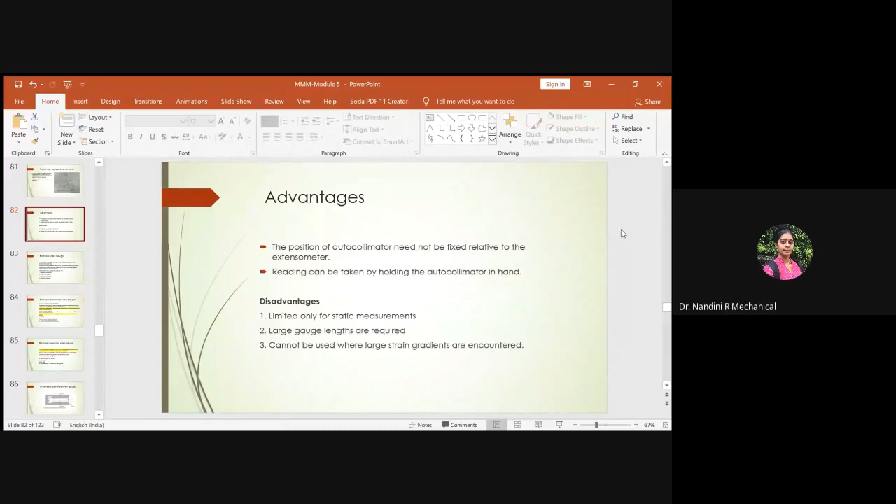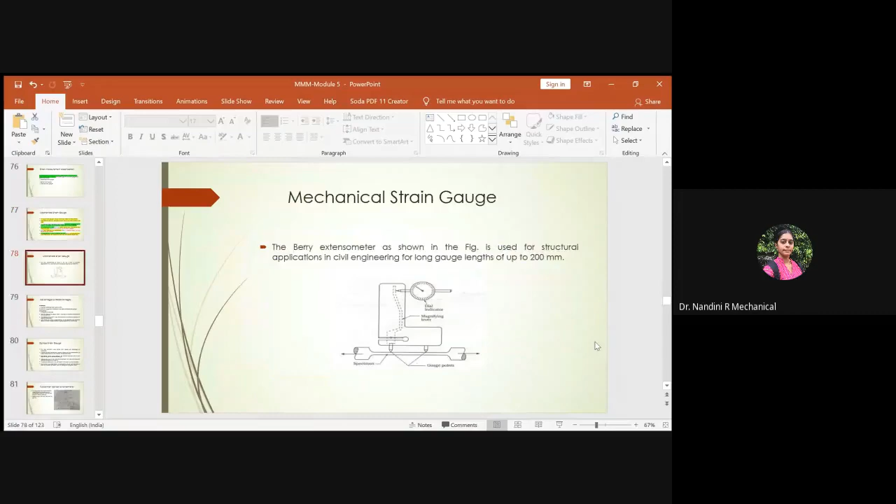Related to strain measurements, we have done what do you mean by strain, strain measurements, classifications, advantages, disadvantages, right? All these are done. Then we dealt specifically with electrical strain gauges. We went on with respect to its classifications as well.

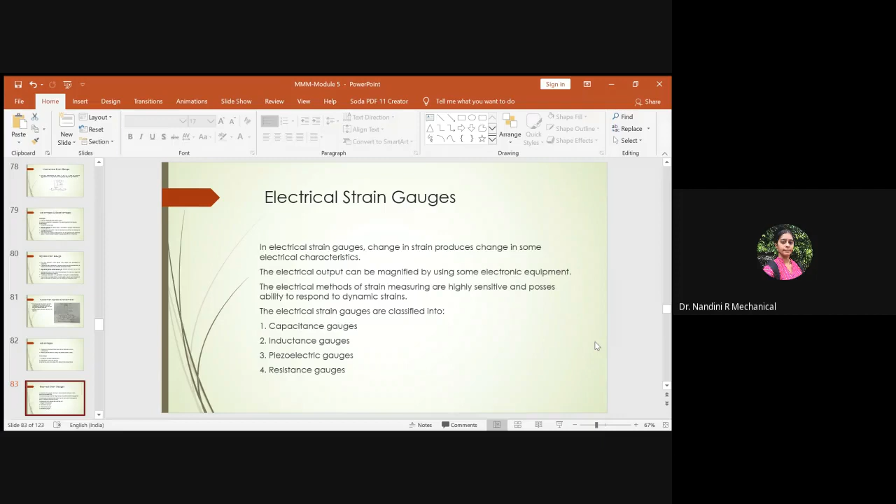In your syllabus, you have in-depth description for electrical type of resistance strain gauges. So we went on related to what you mean by electrical strain gauges, how does it look, how it operates, and what are its classifications. In that we were held up with the last type of classification, which is nothing but our semiconductor or piezo-resistive strain gauge. So this part we have to now deal about.

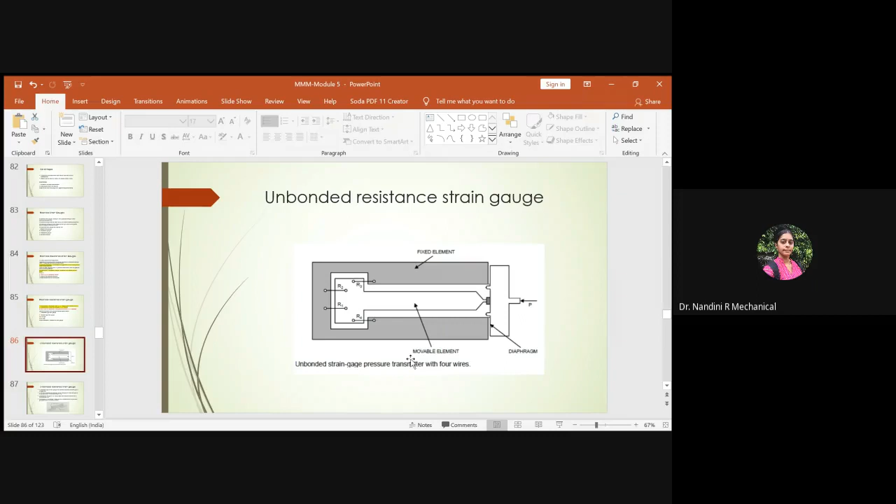We have dealt about how the structure looks like in unbonded type, how it is operated, and with respect to bonded type, we had two classifications. One is the wire and the foil method. So that also we discussed. This is the foil type which is done. So now we have to focus on semiconductor gauge, or it is also called as piezo-resistive strain gauge.

If it is piezoelectric, it becomes a dielectric material. If it is piezo-resistive, it comes into the category of semiconductor. Hence the name dual, either semiconductor or it is called piezo-resistive. So piezo-resistive and piezoelectric, both are different. It comes into two huge classifications, which is semiconductor and dielectric. So here we are just focusing on piezo-resistive strain gauge, which is also called semiconductor strain gauge.

These piezo-resistive strain gauge or semiconductor gauges are usually formed by being etched out from the single crystals of either silicon or germanium. Both silicon and germanium are semiconductor materials. So these are etched out through a single crystal of silicon. This helps in getting the piezo-resistive strain gauge in the form of thin films.

If you want it in the form of thin films, then you etch out from the single crystal. If it is in bulk, if it is multi-lattice structured, then it will not be a single crystal, single orientation of the lattice will not be available in that case. Since it is a single structure, we are focusing here on semiconductor gauges of thin film or foil kind of structure.

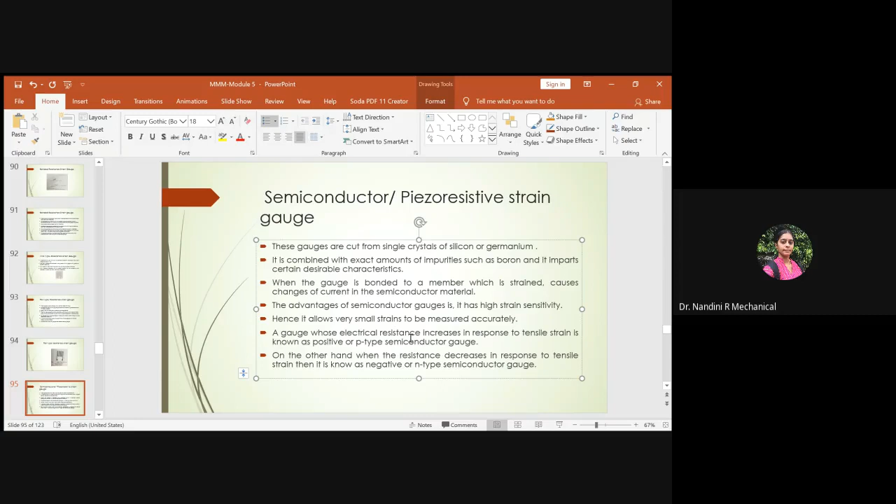There are some configurations related to the dimensions we have to use. Usually a semiconductor gauge consists of a rectangular filament, as shown in the figure, which could be made using either silicon or germanium. As for the area, it will have 0.05 mm thickness and 0.25 mm width. This is the specification for a semiconductor gauge of rectangular filament. Along with this, the length of the semiconductor gauge can vary from 1.5 to 12 mm, based on the requirement and functionality characteristics. You can select the semiconductor strain gauge of different lengths as per the requirement.

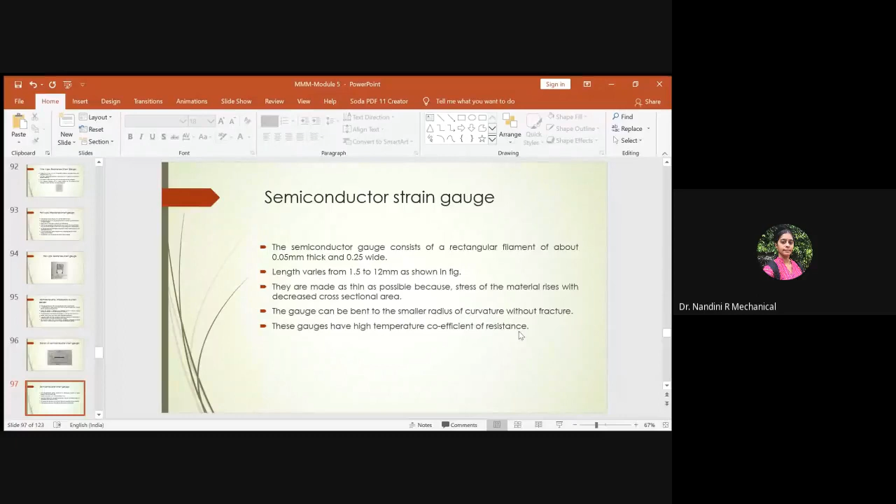Due to this thin thickness, the gauge can be bent to a smaller radius of curvature without fracture. These semiconducting materials are flexible and can be bent to the smallest radius of curvature without fracture because they are not brittle in nature. This is one characteristic of semiconducting strain gauges. Also, these gauges are very suitable for high temperature coefficient of resistance measurements. So these are the important characteristics of a semiconductor strain gauge, how it looks and how it operates.

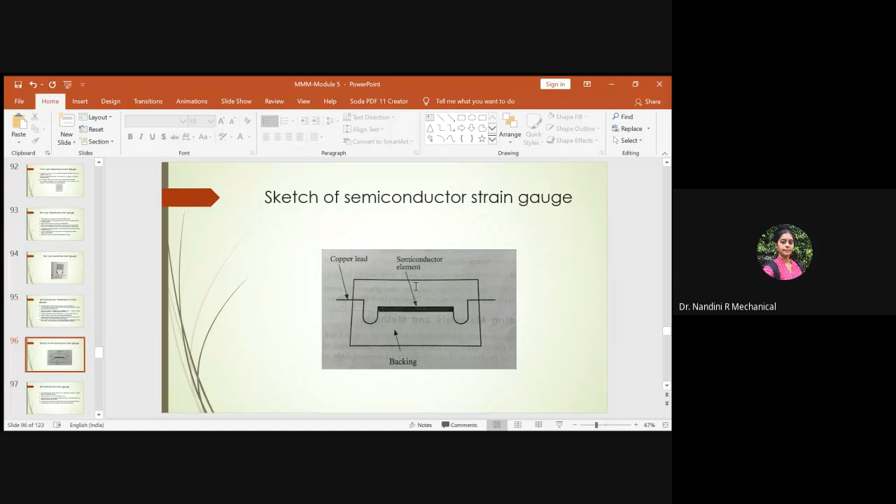Apart from that, there are a few disadvantages we have to speak about, and these are very few. The first one is the output of the gauge is non-linear with strain, meaning the output from the gauge has a non-linear characteristic curve. The response for the strain in the output electrical signal does not vary linearly; it is non-linear and could even be exponential. It depends on how the output is revealed for the given input strain. So this is one disadvantage, that it is not linearly variable. The second one is the strain sensitivity is dependent on temperature.

You cannot say the sensitivity of the strain you get at room temperature will be the same as the sensitivity of the strain you get as temperature increases, because it is directly dependent upon the external temperature where you keep the device. Hence the strain factor is not an independent variable, it is a dependent variable in case of semiconductor strain gauges. This is also one of the drawbacks, because when you use this type of strain gauge you should be aware of the room temperature and the temperature enhancement, since with increase of temperature you get variation in the strain.

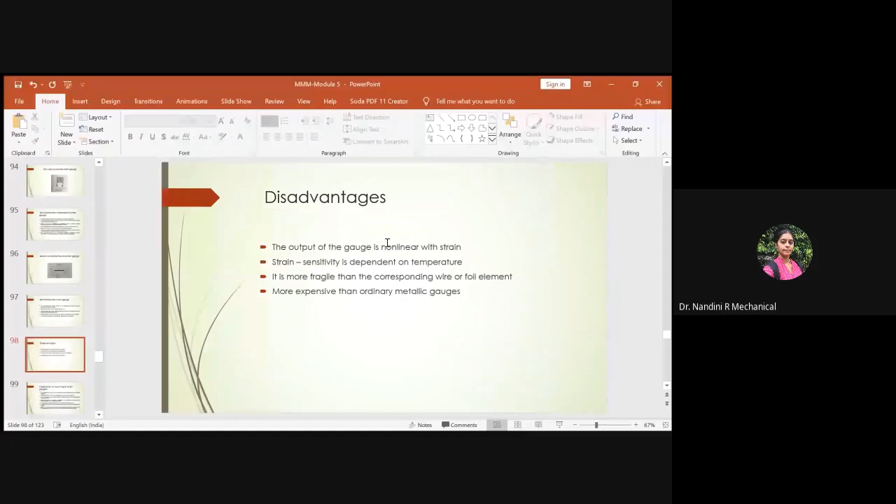After knowing about the concept of semiconductor strain gauges, you should understand how the preparation and mounting of a strain gauge actually takes place. So what are the steps to be followed? We have a few steps, and one has to strictly follow and abide by the rules and regulations of the procedure so that you get a good, well-packaged strain gauge device.

The first step is that the surface on which the strain gauge has to be mounted should be cleaned properly. The strain gauge could be embedded on a movable platform, or on a foil, or on wire, as studied in the wire or foil method. So the surface on which the strain gauge has to be embedded or mounted has to be cleaned properly.

Second, if you have any traces of grease or oil on the surface, it should be cleaned using acetone. This acetone helps clear any grease, oil, or impurities present on the surface on which the strain gauge has to be mounted, because it should not create voids or impurities embedded between the surface and the strain gauge. If that happens, proper adhesion or bonding will not take place, and as a result you have to ensure it is also cleaned using acetone.

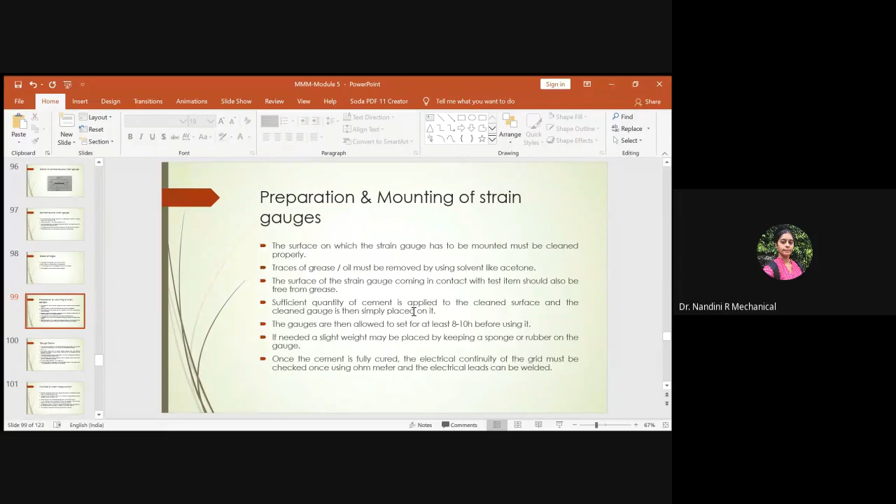So now you should come to know what is meant by gauge factor. We have studied this in depth in our strain gauge experiment, where I explained the concept in brief, around a 1.5 hour class. This is just a brush up in the fifth module, but let us still focus on the gauge factor, and what you mean by it.

I have already told you that the change in resistance relative to the change in length gives us the gauge factor. The electrical resistance of a metallic conductor usually varies directly with its resistivity and length, but is inversely proportional to the cross sectional area. So we have the equation: electrical resistance equals rho L by A, where rho is the resistivity factor, L is the length, and A is the cross sectional area of the metallic conductor being used.

One thing to keep in mind is that to measure electrical resistance, we always use a metallic conductor. So in the metallic conductor, what is the resistivity factor, what is the length of the conducting material, and what is the cross-sectional area of the conducting material? Based on these parameters, we evaluate the electrical resistance of the given metallic conductor.

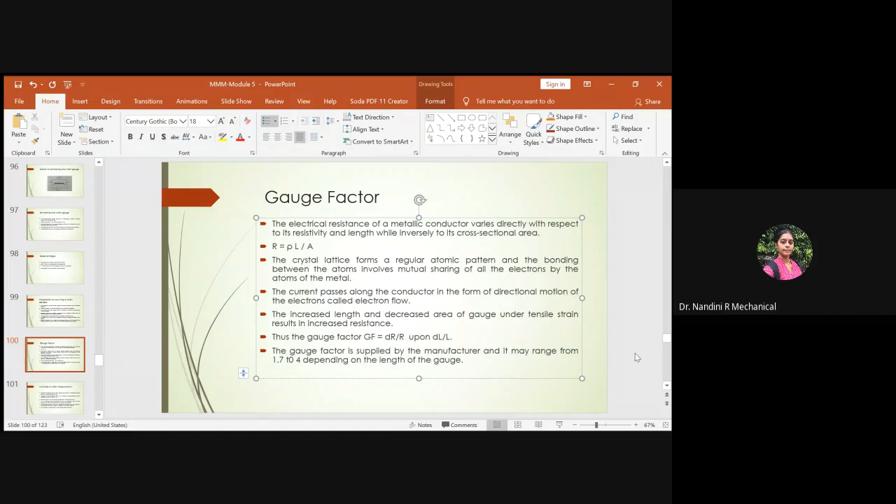We also spoke about the length of the gauge material, which varies from minimum to maximum length. Based on the length of the gauge material, the gauge factor will keep on varying, and it purely depends upon the electrical resistance of the metallic conductor we are using. So based on the variation in electrical resistance and the variation in length of the gauge, the gauge factor will be provided by the supplier, and this value mainly depends upon the length of the gauge we are using. So this is about the gauge factor.

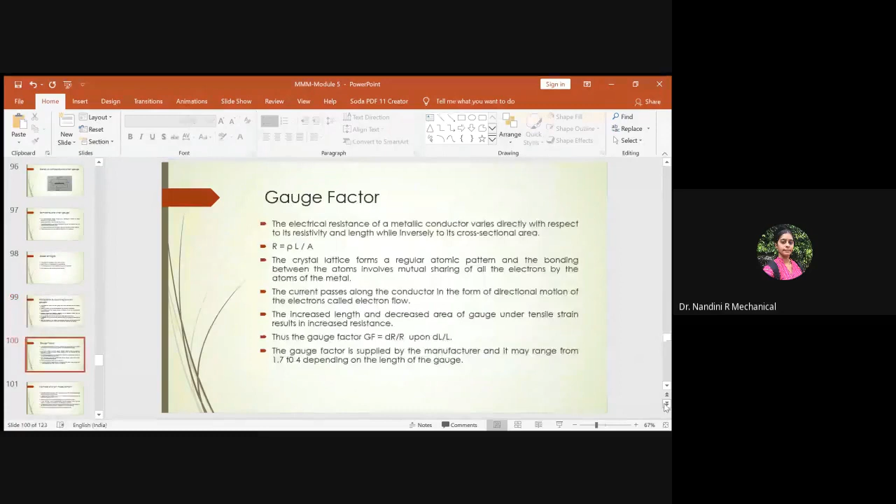Once you are aware about strain gauges, preparation method and gauge factor, you should also know which methods are used to measure the strain. Usually we follow two: the null method and the deflection method, which we have dealt with already with respect to our experiments. So we are again telling the same stories.

Electrical resistance type of strain gauge usually uses a sensitive Wheatstone bridge circuit for measurement of strain. We have already explained what a Wheatstone bridge circuit is, which has four resistor arms, how you balance it at the null position, and when you vary one of the resistances, how the variation is measured using the deflection method.

So the same thing - in order to measure the strain, we use a Wheatstone bridge circuit, which consists of four resistive arms with a source of energy. These resistive arms are connected to a battery and a meter to show the readings, as shown in the figure. You have seen the sketch already, where you have four resistive arms connected to a meter with a source of energy, which is our battery, and this is the flow of current through the resistor arm.

And for balancing, we will balance and get the null position. So the basic principle of the bridge can be divided into two categories. One is the null method, another one is the deflection method.

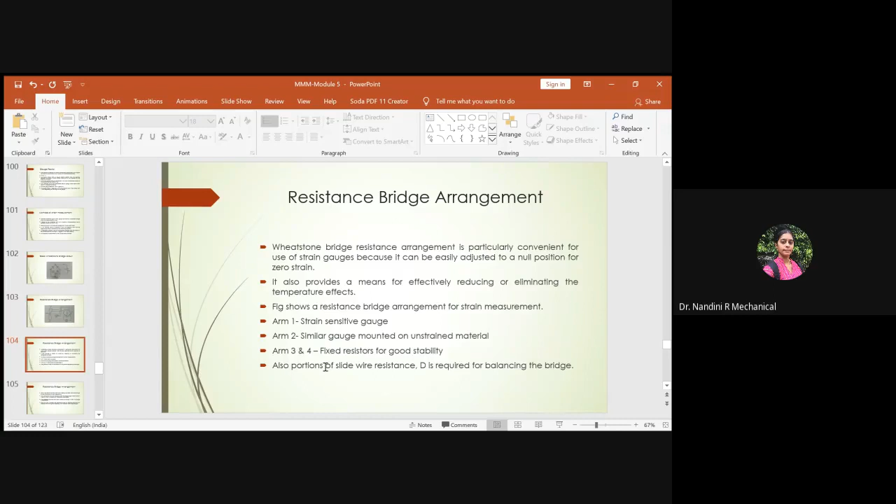So in case of the deflection method, continuous readings are taken from one change of strain to another without rebalancing. In this resistance bridge arrangement, we won't keep on balancing at every stage, because due to one strained and one unstrained arm, there will be variation in the values and it will not be balanced. As a result we go on with the deflection method and take the readings.

So this is convenient in comparison to the other method, but it is less accurate since the bridge output tends toward non-linearity. So here the strain you get is not varied linearly.

The output we get is a non-linear variation with respect to strain, and as a result, the readings are not very accurate. But it is more convenient because there is no need to balance it each time, and hence it is called the convenient method. Since it cannot give linearly variable output signals, it is not very accurate, and the strain value keeps varying depending upon the non-linearity factors associated with this kind of bridge.

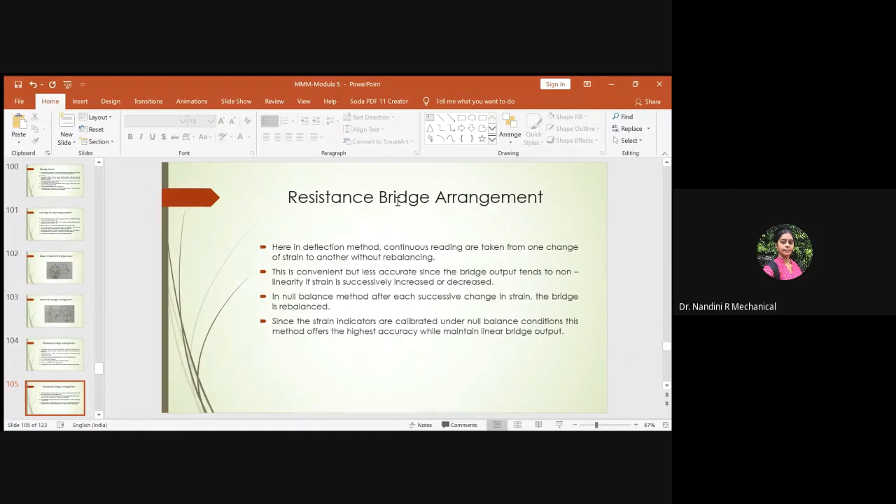So that's what I told you. In the resistance bridge arrangement, you have two arms for the resistors: one arm for the strained strain gauge and the other for the unstrained strain gauge. Due to the strained and unstrained strain gauges, you will not have a null position, and hence you take readings of the variations in the indicator without balancing — this is the deflection method.

Similarly, if you want to opt for the null balance method under the resistance bridge, you keep doing the balancing of the bridge before taking the reading, which gives more precise and accurate results that vary linearly. In the deflection method, however, the strain response varies non-linearly. So based on the requirement and the accuracy needed, you can go ahead with either the null method or the deflection method, even in the case of the resistance bridge arrangement.

In a normal Wheatstone bridge arrangement, you have four normal legs of resistors R1, R2, R3, R4, whereas in the resistance bridge arrangement, two legs of the resistors are removed and replaced with strain gauges — one with strained material and the other with unstrained material. But in both cases, you can measure the output signal under the null method and the deflection method.

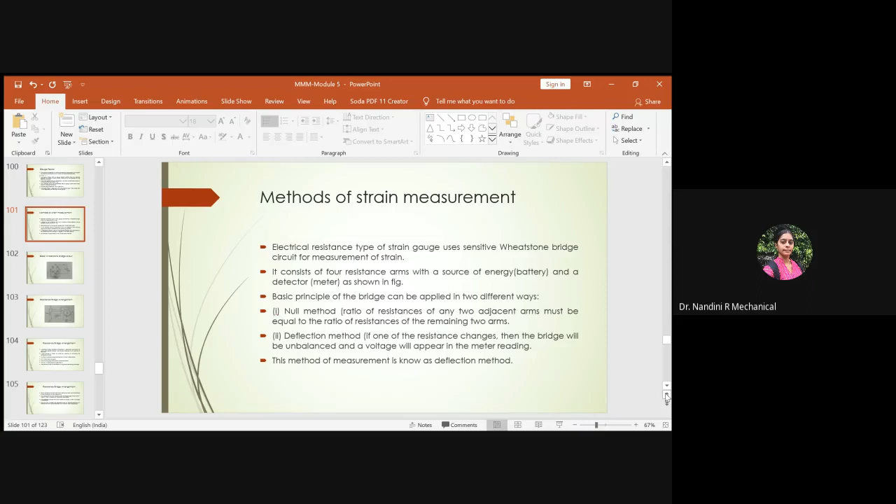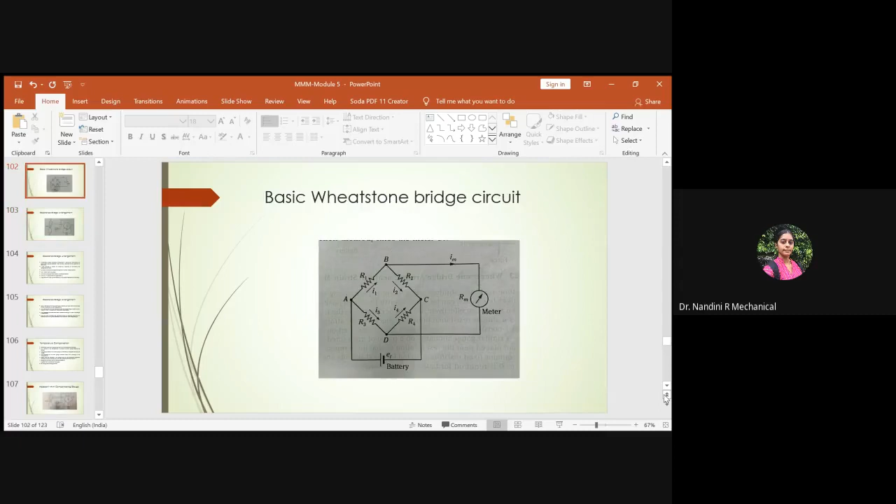So if they ask you to explain the strain measurement methods, you have to speak about both methods — how strain is measured under null condition and deflection condition — along with the sketches you have to draw. So this is about the resistance bridge arrangement and Wheatstone bridge circuit, which are used to measure strain.

And then you should understand what happens in the case of temperature compensation — how it varies with respect to temperature parameters.

Now we have studied resistance type strain gauges, so let's see how they are affected by external temperature. One thing to keep in mind is that resistance type strain gauges are very sensitive to temperature changes, so any variation in temperature will directly influence the strain gauge readings. There are three factors involved in this variation.

The first factor is that the gauge factor of the strain gauge is affected by temperature owing to creep. Due to the creep nature of the conducting material, temperature penetrates into the material through the formation of creep, causing variation in the strain and variation in the gauge factor measured by the strain gauge.

While explaining the gauge factor earlier, I mentioned that it is also affected by the external environment — the strain we measure is directly affected by the external environment and is not independent of temperature. I told you that at that time, and the same is replicated here in temperature compensation.

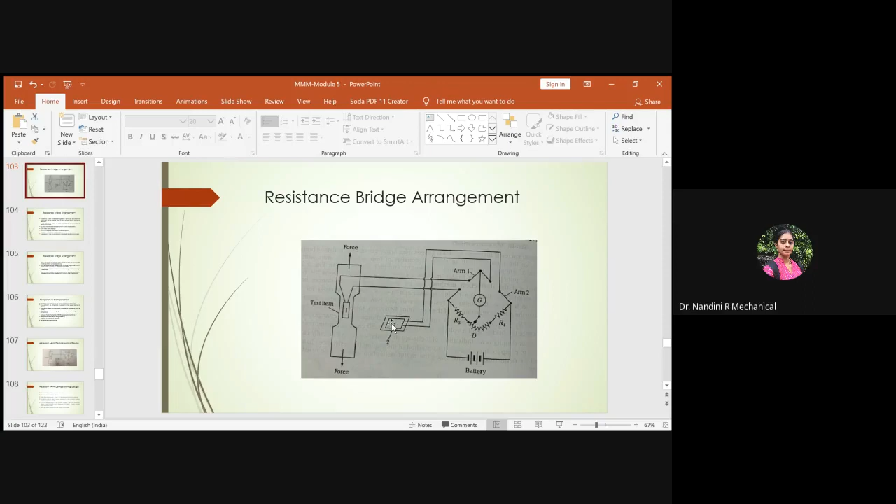It is clear that any change in resistance of gauge 1 due to temperature change is cancelled by the similar change in resistance of gauge 2, because both have the same value, so it gets cancelled and becomes null, and the bridge will be balanced. As a result, we always use a compensation gauge made up of the same material. In the previous setup we studied, the bridge arrangement had a material which was unstrained, and this was the material to be tested—both materials were different, so there was no chance for these two to balance and make the bridge zero.

But in case of temperature compensation, to overcome the effect of temperature, we now use two gauges of the same material—one for compensation. So any change you get in the test gauge, you will have the same change in resistance here, so that both get nullified, it gets balanced, and the effect of temperature compensation could be overcome. This is the reason why we use a compensation gauge in the case of the adjacent arm gauge pattern.

As a result, the output is unaffected by the change in temperature. If you do not add a compensation gauge, the strain you measure will keep on varying with respect to the external temperature where the device is kept. At room temperature you get one strain value; if the temperature increases, it keeps on varying. So you won't have a consistent strain value for that material at all.

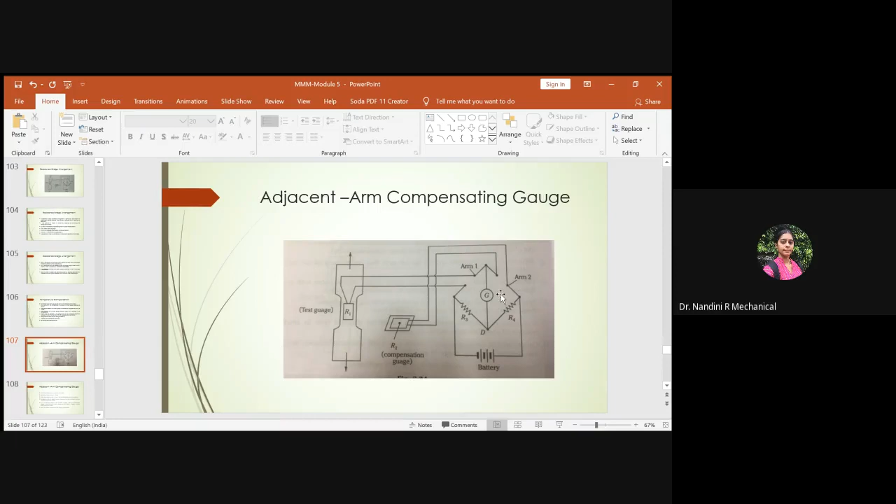To overcome this, one method is to use a compensating gauge. This compensating gauge helps nullify the variations caused by the external environment, so the bridge becomes balanced and the variation due to external temperature can be overcome. This is the first method of temperature compensation.

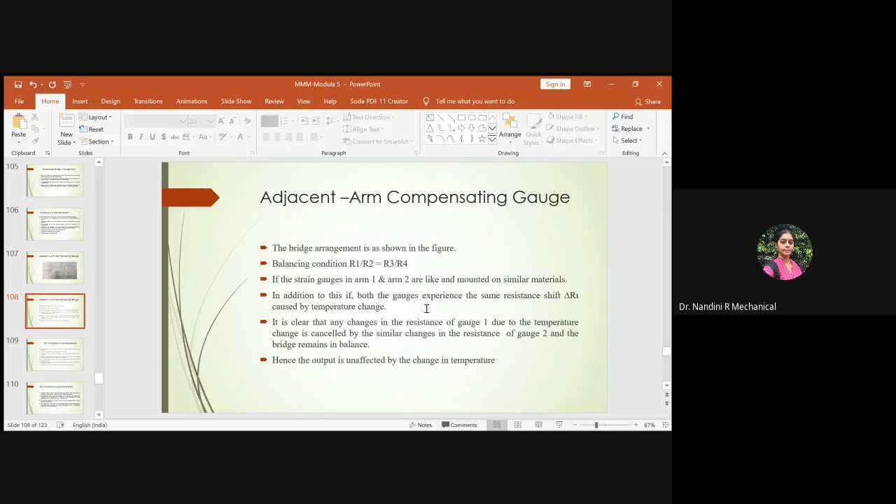What is the next method? It is called self-temperature compensation. So what happens in the case of self-temperature compensation?

This gauge should exhibit zero change of resistance with respect to change of temperature when bonded to a steel base. If you have a steel base as a substrate on which the strain gauge is bonded, it will show a zero value of change in resistance with respect to temperature, meaning there is no external effect of temperature embedded into the strain value we measure, because we use a steel base here as a substrate, which is like a foil or a wire. So we consider a conventional advance gauge bonded to a steel base.

Until now, we studied bonding of strain gauges through foil or wire; we haven't come across a steel base. This steel base acts as a good substrate material to bond the given strain gauge, so the gauge is well bonded to a steel base in order to overcome the external effect of temperature.

Next, understand the coefficient of linear expansion of this alloy, because the gauge is embedded and bonded with a steel base. This is a combination of alloy. The gauge is made up of germanium, embedded with an impurity called boron — that itself is a combination of alloy, now bonded with a steel base.

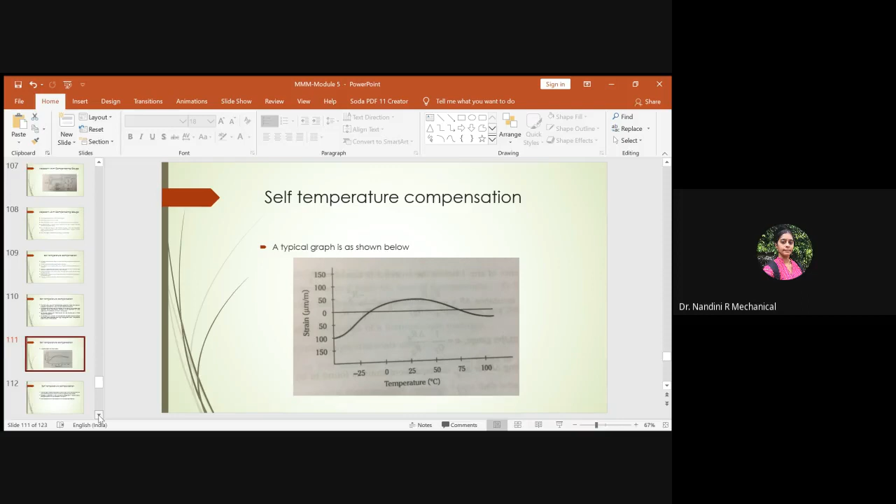Then you will come to know whether the readings you're getting are right, accurate, or whether the equipment has to be calibrated again before using. So all these you can think about and analyze. When you do hands-on work, you will be more familiar. So this is about the compensation method.

So from the next class, we will start with the temperature measurements. Temperature measurements is the last part of module 5. If we cover that for around 3 to 4 hours, we can complete our syllabus.

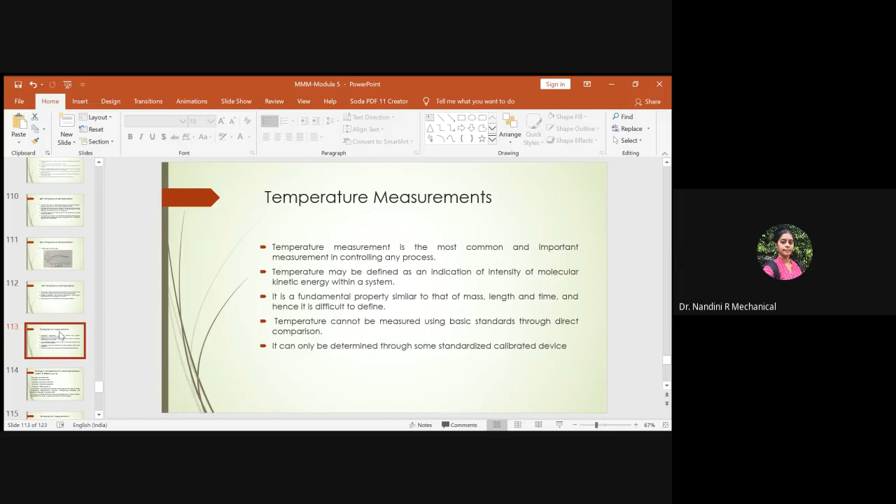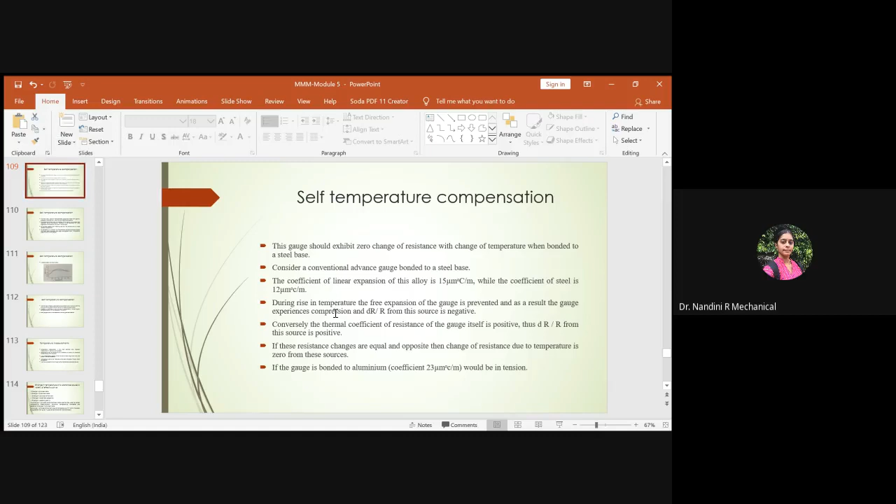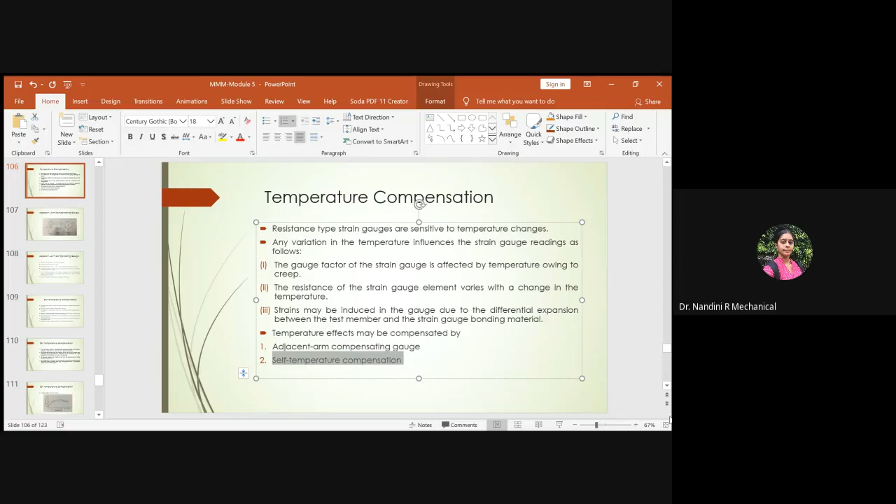So that's the self-temperature compensation, I have already explained that. The other method was adjacent arm compensation. Under temperature compensation, we have two methods: adjacent arm compensation and self-temperature compensation. So you should explain both. Before explaining, you should tell the reason for temperature compensation, why it is needed. Then you have to start with a neat diagram and explain both methods. This ends the half section of module 5, and in the next class we start with temperature measurements.